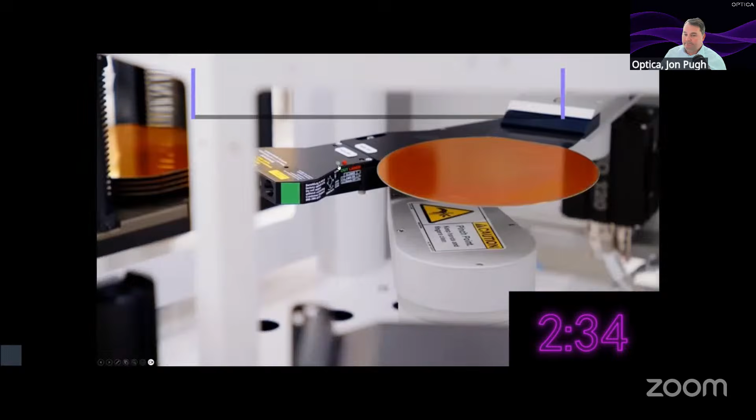Thermals held just right. Datacom shouts the loudest, but it is not alone. Quantum sensing lidar defense need packaging of their own. How do we package photons at the volume AI demands? How do we scale the light with machines, not human hands? Cost per gigabit, cost per port, yield must rise or the roadmap falls short. How do we package photons and build the future on time? Bring the light to the package. Bring the package to the line. Hey, foundries and OSATs, equipment on the floor. System teams are waiting, they need more, more, more. AI factories need light alive.

Alignment automated, interfaces agree. Wafer level testing at industrial speed. Not a demo, not a slide, not a promise, still untried. Ports must ship, lasers survive. AI factories need light alive. How do we package photons at the volume AI demands? How do we scale the light with machines, not human hands? Cost per gigabit, cost per port, yield must rise or the roadmap falls short. How do we package photons and build the future on time? Bring the light to the package. Bring the package to the line.

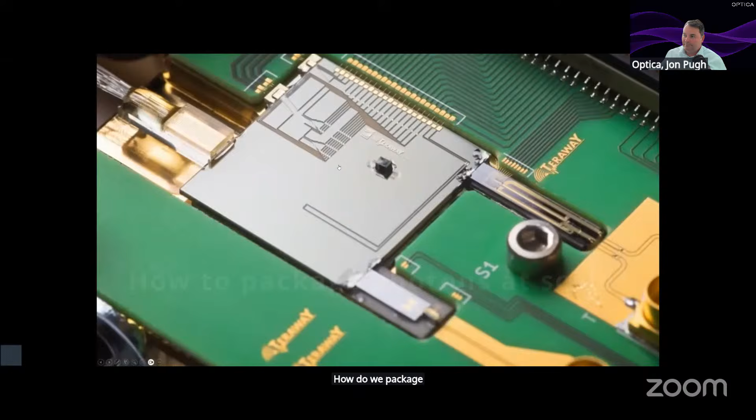Welcome to a packed Optica online industry meeting. Today we're asking one direct question: how do we package photons at the volume AI now demands?

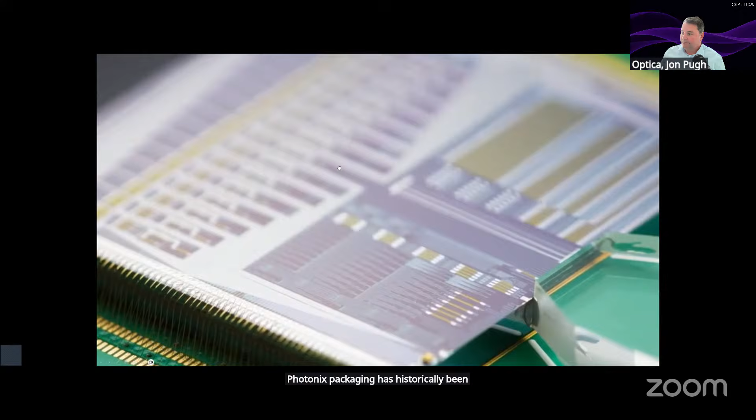AI infrastructure has a packaging problem. Hyperscale GPU clusters need optical I/O on the package itself, not at the faceplate. NVIDIA's Quantum X and Spectrum X switches are early proof that the industry has accepted this direction. But shipping an announcement is not the same as populating an AI factory with hundreds of thousands of optical ports, ready in time for the next GPU launch. Photonics packaging has historically been slow, low volume and handcrafted. GPU deployment schedules are not. That gap is what we're here to close.

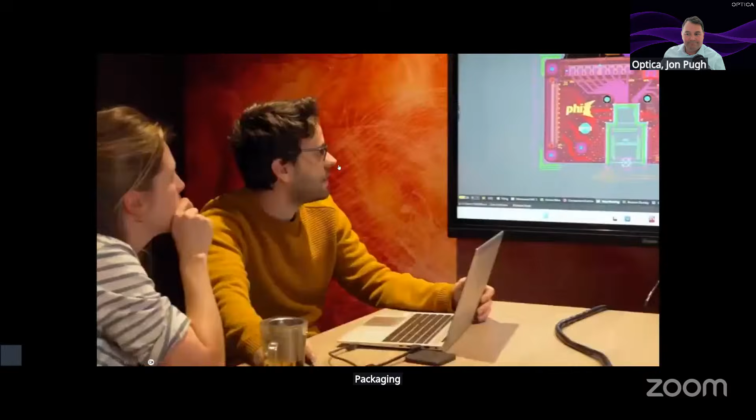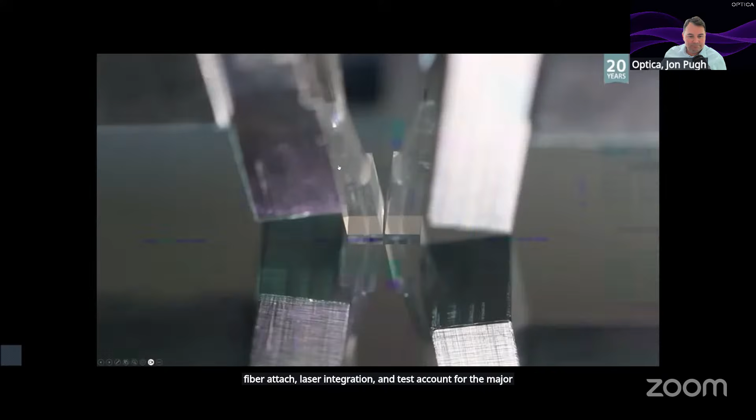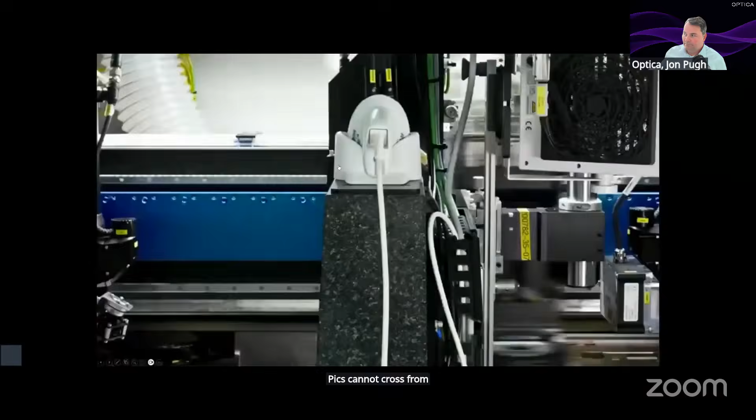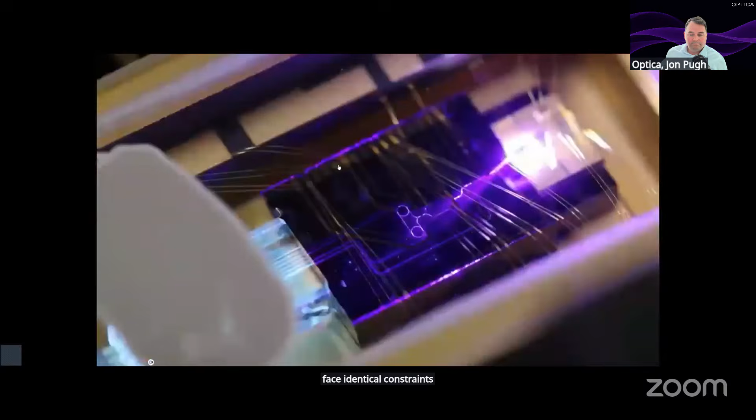Packaging is also the dominant cost in a photonic integrated circuit. Assembly, fiber attach, laser integration, and test account for the majority of a module's cost. Until packaging industrializes with wafer-level processes, automated alignment, and known good die testing, PICs cannot cross from niche to volume market. And the same bottleneck is blocking multiple industries simultaneously. Datacom is the loudest voice, but quantum, biomedical sensing, LiDAR, and defense face identical constraints. Solving this once unlocks all of them.

In the next 90 minutes, we'll work through the specific problems. And to do that, we've brought together two groups of experts. On the technology integrator side: Nokia, NVIDIA, Jabil Photonics, and Light Matter. On the technology enabler side: Photon Bridge, Epiphany Design, Verna Leap, Fix Photonics Assembly, Finetech, and Cellerprint. This meeting is free to attend, made possible by our sponsors, PHIX Photonics Assembly, Ligentec, Vanguard Automation, Nanoscribe, Finetech, and Photon Bridge. So let's get started.

Hello everyone and welcome to a very special session. We have been working very hard over the last months and we have seen record numbers on registrations because we are talking of perhaps the biggest challenge that the photonic industry is facing. Many of you were with us at OFC and you saw the huge boom in demand driven by AI. And we saw the need to change the way that we have been dealing with photonic integrated circuits.

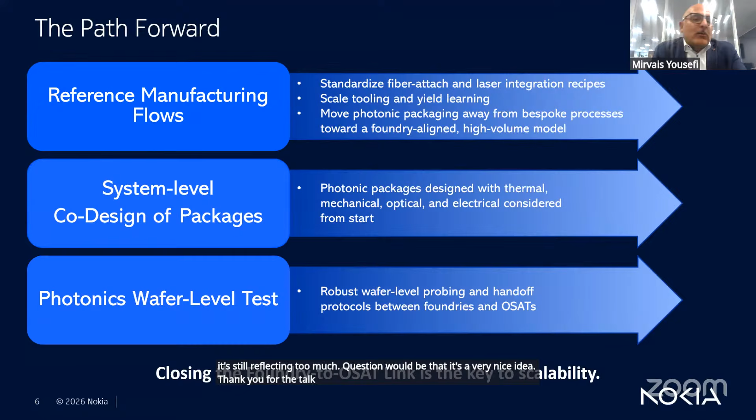Question would be that this is a very nice idea. Thank you for the talk. But you require a bunch of peripheral technologies, like the automation equipment etc., to come into play and be mature in order for you to do this. Do you have an internal timeline, or do you know when we could expect this to happen?

So the obvious answer is as soon as possible. But I think, just catching up with the wave of co-packaged optics and near packaged optics, we're looking into a timeline of 2027, 2028, really.

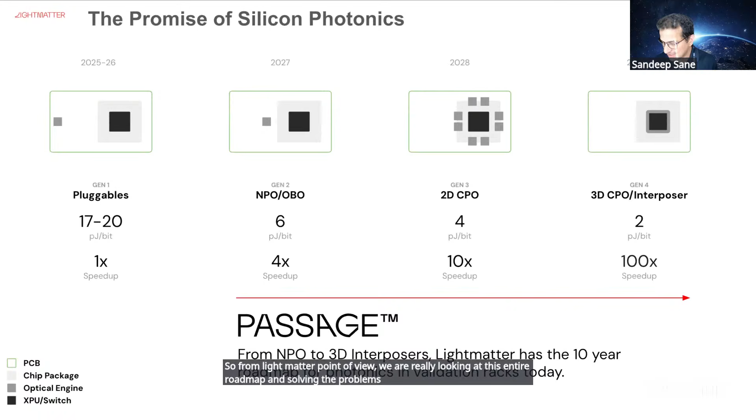So from Lightmatter's point of view, we are really looking at this entire roadmap and solving the problems as the demand of silicon photonics is evolving in the industry.

We are showing that we can deliver 800 gig to 1.0 terabit per fiber that is available today. And it can support both bi-die and uni-die, up to 32T per optical engine, and you can support up to 1 kilometer. And we do both standard or custom designs as needed.

But beyond the technology point of view, while we deliver what is needed for the market, we are heavily focused on what we can bring as key technology enablers with the 3D CPO or interposer programs. These are the two activities we are heavily involved in.

The first one on the left shows a 3D CPO, what we call our L series. This is based on chip-on-wafer assembly flows, where your EIC die is attached on the PIC die as shown, and it's 3D integrated, with detachable fibers at the perimeter.

As Leron said, fiber attach and giving the radix that customers want is a very critical vector. And we believe that detachability allows you to solve at least the fiber attach problem. The next question is, how can you scale? How many fibers can you really attach per edge, which is a scaling problem we have to focus on.

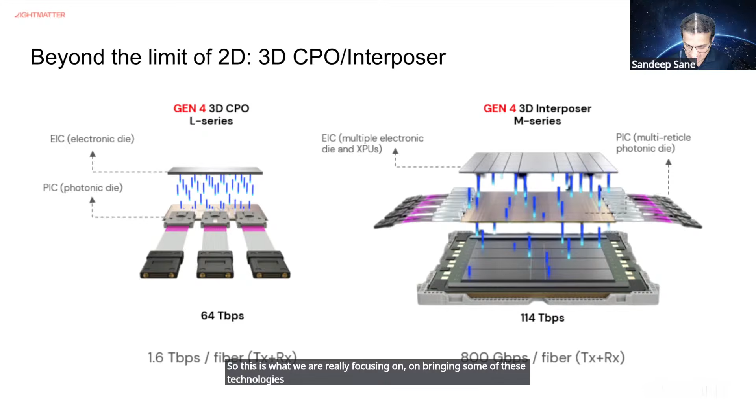Now, if you look at the key challenges for us to enable some of these parts at high volume, it will sound very similar to what Armagan has said, which is good to hear—the same voice coming across. I'll go through 4 challenges that I see, similar to what was previously discussed. Number 1, delivering a known good optical engine is a must-have.

But quickly, because your electrical bandwidth will be limited if you continue on a standard organic substrate, you'll have to integrate optical engines on advanced packaging technologies. Some of these, like EMIB style technology that Intel has, are fairly easy to integrate. But then there are other technologies like CoWoS or CoWoS-L, where now you need to dedicate the optical engine to the die complex upfront.

And this makes it very critical to ensure that when we build the optical engine, it's known good to ship out to any end customer. Think about it almost like an HBM—HBM people build it and ship it out. The optical engine needs a very similar approach.

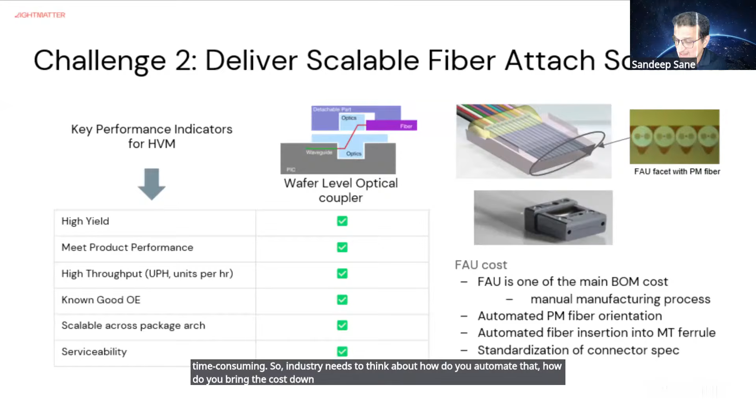Cost is a big deal here, right? The FAU is one of the main BOM costs, and it is primarily because of the manufacturing. It's manually done, and it's driven by the PM fibers, because the requirement of the rotation of the stress rods is really very time consuming. So industry needs to think about how do you automate that, how do you bring the cost down for some of these connectors, and making standardization a must-have.

The third challenge to delivering scale in HVM is really equipment and materials, right? Equipment, you have to transition to automated alignment in seconds, not minutes. You have to be able to do parallel processing so that you can handle alignment, dispense, and UV cure in parallel. And also, we should be able to reconfigure this equipment to support multiple products.

From a materials point of view, this is the biggest time adder today. Epoxy - ideally, just to showcase this, we are showing how many epoxies are used in a simple wafer level attach process, and you will see at least 2 or 3 epoxies are used. If we can align to one single epoxy, that would be ideal.

It has to be reflow compatible. Fast UV cure, less than 5 seconds would be ideal. Today this is the slowest step in the flow, it takes tens of seconds to minutes. And of course, lower TG would be helpful to conform to different warpage requirements of these devices.

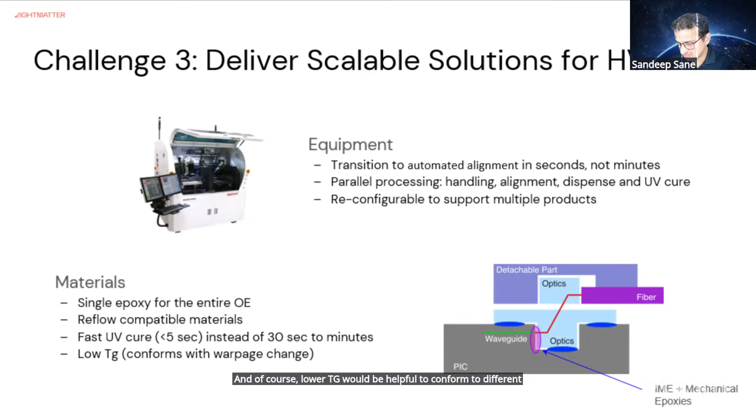If you look at the reasons for it, fiber attach is one of the key things, but higher test times and lack of standardization, similar to what Armagan has talked about, is really causing some of these costs to be much higher. So while we ask the test vendors to work with us on solving these problems, from a product architecture point of view, you really have to design products for DFT, DFM, which is a standard practice in the mainstream industry. But in the silicon photonics world, this has to come upfront and really drive the equipment and material development to push the throughput higher through assembly and test.

So with that, thank you for giving me time to express my opinion, and I'll be open to any questions.

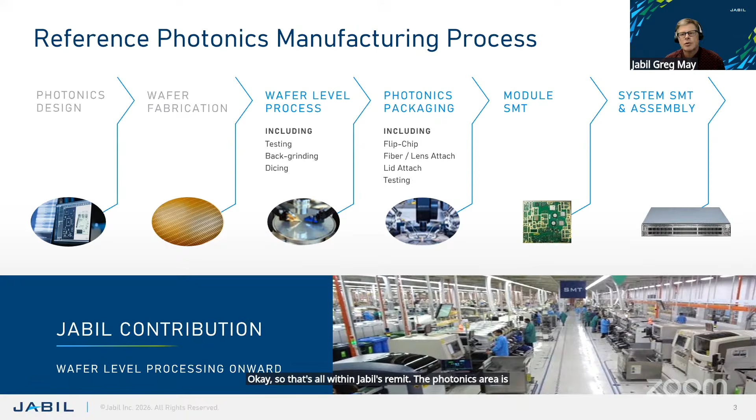Going forward from there, in more of our traditional business, we can put those optical engines or photonic parts onto circuit boards and also do the electromechanical assembly. That's all within Jabil's remit. The photonics area is just over 10 years old, but growing very rapidly.

Most of the audience knows this already. Some of the applications we deal with are transceivers. We manufacture products for other customers, but we also have our own product line from acquiring the Intel product line about 3 years ago, so we have our own going out. We're involved with co-packaged optics and products in that realm, quantum and LiDAR.

Those of us who have been in the industry long enough remember the dot-com boom of the late 90s and how crazy that got and the kind of challenges it portrayed. Now we're in .ai, basically seeing it again, but this time with a lot more vigor and a lot more investment, a lot of real money in this. A very exciting business for us if we can keep up—the hard part is actually keeping up with the demand that's out there.

I won't dwell too much on this. We recognize and acknowledge a lot of the packaging schemes that were presented earlier; this is an overly simplified view of that. And fiber attach, we recognize that too. We've been involved with fiber attach for a relatively long time now, starting with single fiber and coherent type applications, but now we're getting into fiber array units and parallel fibers. There's a number of schemes for that, as we all know.

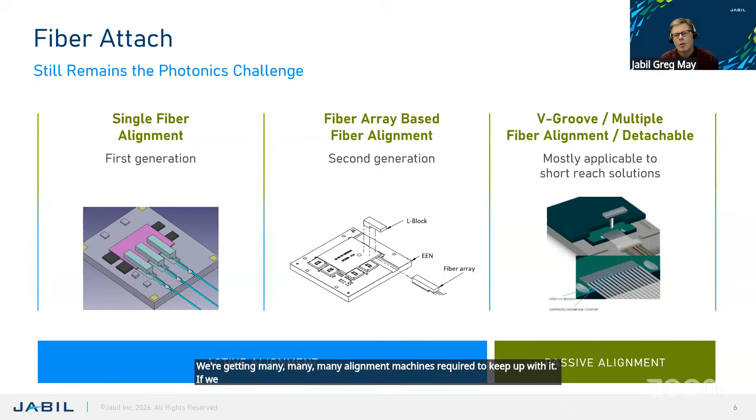So we do have a big challenge here and a big capacity bottleneck when it comes to alignment. For some of the volumes we're seeing, we need many alignment machines to keep up, unless we find a way to break the mold and come up with a different approach.

Jabil's core competency is volume manufacturing, so we really understand what it takes to get something out the door in high volume consistently. With photonic advanced packaging, yield is a real potential issue because you're dealing with so many different adhesives and manual steps. Adhesives are quite challenging to manage—everything from expiry date to supply chain to how they're handled and stored. Automation is critically important, but in photonic packaging it runs contrary, because loading and unloading especially are quite difficult to automate, so if you're not careful there can be a lot of manual manipulation.

I don't think we spend enough time really thinking about all the materials that go into advanced packaging to make a robust product.

It can take a number of iterations and experiments to figure out exactly what you want to do there and to meet the robustness as well as the manufacturing volume objective. We see this with work instructions, the workforces that we need.

And then finally, as mentioned previously by others, production test is really important, catching it at this earliest point of value add. So getting your production test to detect a build error or defect early before you start adding in expensive parts like DSPs, lasers, and other parts like that.

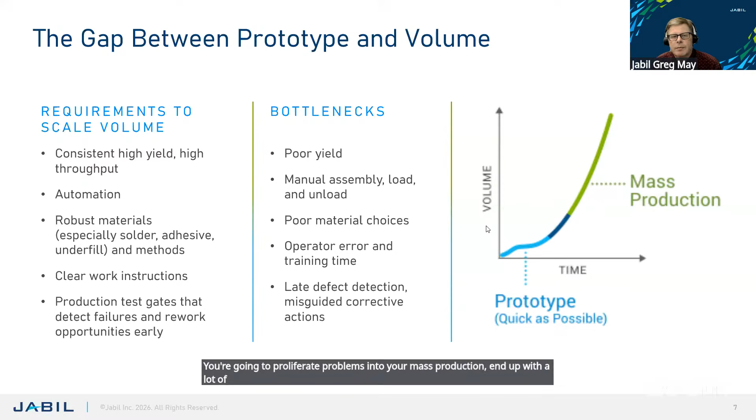The approach that we do here with Jabil is that we take a DFM, DFT philosophy. What we've done, I think, which is fairly unique in the industry, is that here in Ottawa we have an NPI environment with a lot of the same machines that you would see in a volume environment. We have our fiber attach, we have die bonder, we have pick and place, we have reflow, in a captive NPI facility. This gives you the time to do your experimentation without interfering and competing with mass production, in an environment where you're surrounded by subject matter experts.

What we've been finding is that if we work very closely with the customers, but also with quality assurance labs, rapid turnaround of imaging and sectioning in particular is very important to drive and iterate to a robust solution. You need to figure out things like your temperature profiles to get the integrity of your solder correct, make sure it's void free.

We in Ottawa have a fluxless reflow system. So instead of using chemical flux, we use a formic acid vapor that reduces residue and keeps the voiding out of underfill, and also produces clean photonic parts that are less obstructed with particles when it comes to align and attach. So we work closely with our customers.

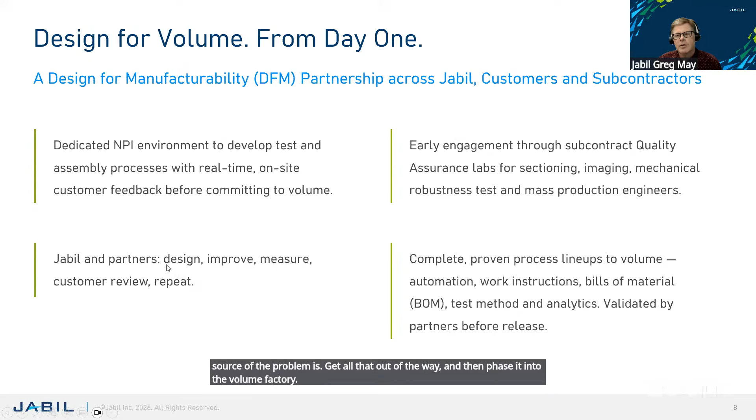We apply what you'd recognize as similar to Six Sigma. We work collaboratively with the design, we improve, we measure the outcome, and we circle back, so we iterate to improve. The whole goal is to get what we know very well from other industries, a lineup with build documentation, bill of materials, work instructions, everything, test methods that actually pinpoint where the source of the problem is. Get all that out of the way, and then phase it into the volume factory. If you don't plant the right seeds, you don't get the right result at the end. So we've really embraced that concept.

Finally, just a bit about what we do. Here in Ottawa we have an advanced packaging facility, again a captive NPI facility with a lot of the processes that you would recognize. I won't get into the detail there.

Currently in Jabil, even though the corporation has probably hundreds of factories, the one that we deal with most is in Malaysia, but we are currently bringing up factories in India and the US as well.

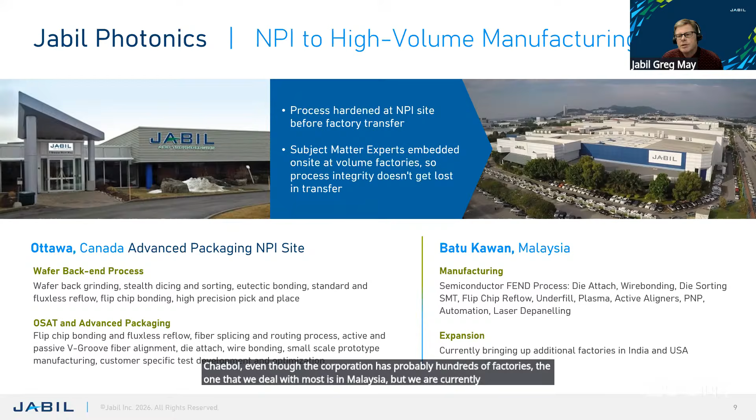Okay, that's my presentation. Thank you.

Thank you very much, Greg. Thank you for being here. We keep receiving fantastic, amazing feedback from all the different big companies that collaborate with Jabil.

Is it limited to big companies when it comes to Jabil? Because most of your customers, at least the ones that I know, they are typically large companies. But I think your presentation today said a bit otherwise.

No, absolutely. Especially in the NPI facility, we will work with just about anybody. There is a hook there, though. There are lots of research institutes that will help you develop packaging, but they're disconnected from mass production. You can get it through the research institute, but our philosophy is to be a gateway to mass production. So the little guys we work with are the ones that we think can get into the factory next, that have really high potential for volume.

The question I asked in the chat was: Jabil has an amazing portfolio of capabilities, all the way from design, wafer fabrication, to packaging. We're looking today at these real challenges in packaging and integration. The question I posed was, where does Jabil intend to lead? Where do you want to really be the one we look to for solving these problems we're all talking about?

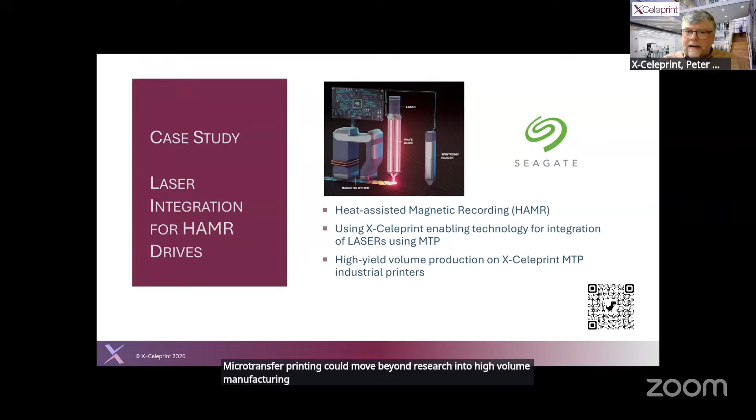Yeah, it's been a journey, but probably the best kept secret for quite a while, right? Because it's not simply that it's happened this year that Seagate is leading the charge in this type of integration. It's actually been happening for quite a while, albeit secretly. It's an important proof point, but it's not unique, in that many of our comms customers now are beginning to see those benefits. So it has moved, you could say two years ago, really into a high volume production environment.

And now the telecom and datacom sector is actually benefiting from the proof points that were delivered by hard disk drive. Even though it sounds like a different application, the challenges are exactly the same, whether it's with or without adhesive integration, the diversity of materials that have to be handled. We've passed way beyond research now into high volume production, and it's all on the same tool platform. So the tools that are in use for research and proof of concept are now moving all the way through to the volume manufacturing scale.

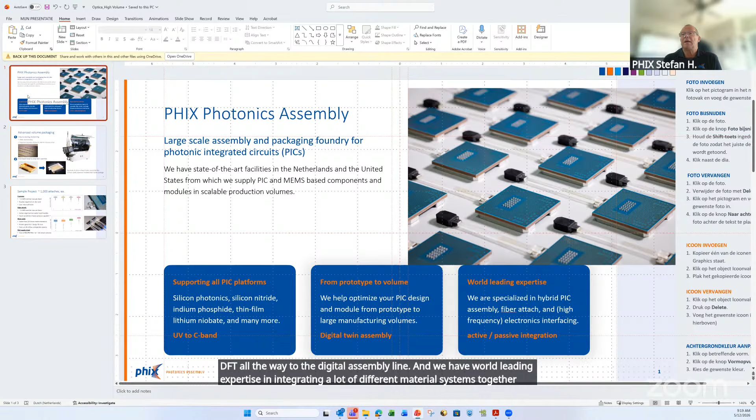We heard from Jabil a very great presentation. We do digital twins, and not only design the product, but we also do digital twin assembly. We bring it all the way from designing your product, DFM, DFT, all the way to the digital assembly line. And we have world-leading expertise in integrating a lot of different material systems together, active, passive integration, just in one dimension or in 2.5 dimensions.

And when we talk about advanced volume packaging, what do we do in terms of scaling product? We address all these pain points, to a different level than you heard before from the end users: fast, reliable wafer level processing of tested components of known good dies. The core expertise is summarized here.

Two different streams of core expertise. One is wafer level assembly processes, of active and passive components, whether it's an optic or whether it's a VCSEL or a gain medium or a photodiode or another material system. We put die on wafer in a fully automated way with an accuracy of 300 nanometers and below.

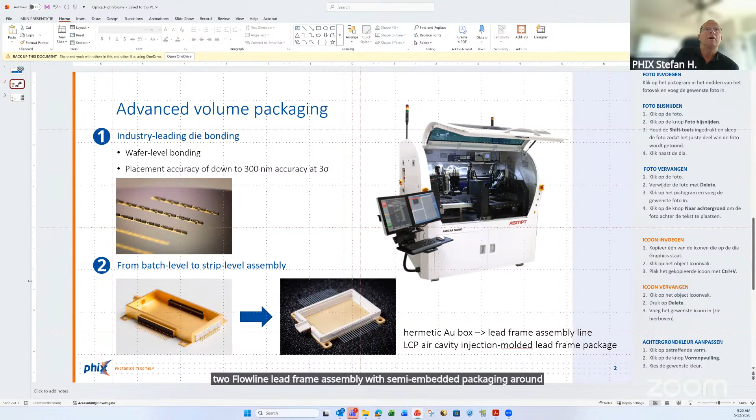And last but not least, I wanted to round up our presentation with one of our sample projects in the datacom industry, where we do fiber attaches in a fully automated way for the different configurations out there, whether it's a V-groove or an edge attach.

If you go to edge attach, insertion losses are a little higher, and process capabilities are still a little lower, and that is part of the known good die strategy.

What do we see in the future for us to address? This is nothing new, we heard that from other speakers as well: lower losses is always good, better known good dies designed for test, faster curing, and also reflow compatible epoxies. So we're heavily investing in epoxy-free interfaces, not only for that purpose but also since we're pushing into the visible and the UV in many other applications where we need epoxy-free interfaces.

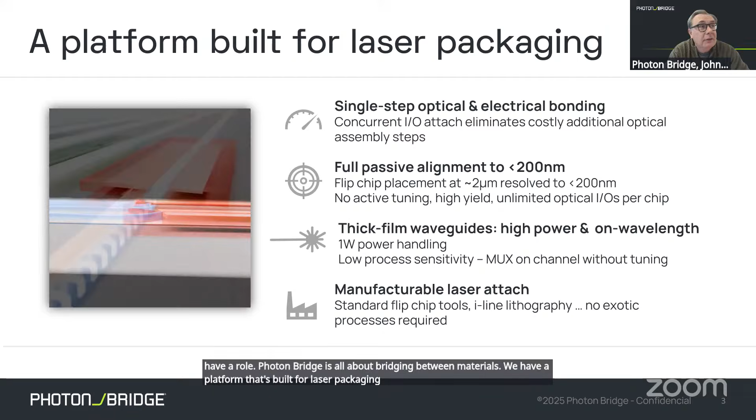You can see a placement of a laser or a modulator or whatever active device you like onto a piece of silicon. It's all about single-step optical and electrical bonding in one go. We do in seconds full passive alignment to less than 200 nanometers based on a flip chip placement accuracy of 2 micron. That means you can do it at speed.

Our platform includes thick film waveguides, which means you can deliver and transport high optical powers, and you can be on wavelength. Thick film for us means low process sensitivity, which makes the design and performance of the MUX just better. All this adds up to a manufacturable laser attach platform, with highly scalable standard flip chip tools and i-line type lithography, so no exotic processes required.

So what I thought I'd do next is share a little insight into what we're doing with this platform. This is the Photon Bridge laser source, designed to scale. Here's a picture of our TOSA, which we've announced we are packaging with PHIX. It's got on-silicon wavelength multiplexing, building on our high on-silicon power, scaling colors by addition, not amplification, which means you can move through 8, 16, and then 32 colors.

Perhaps really important today, we bond fully manufactured, burnt-in tested indium phosphide die. Our process means we have a path to multiple qualified sources, offering supply chain redundancy and resilience that we think is unique to the platform. We're developing it today, stay tuned. Target performance is greater than 30 milliwatts per wavelength per fiber, targeting a 16% wall plug efficiency, which is what we believe the market needs today.

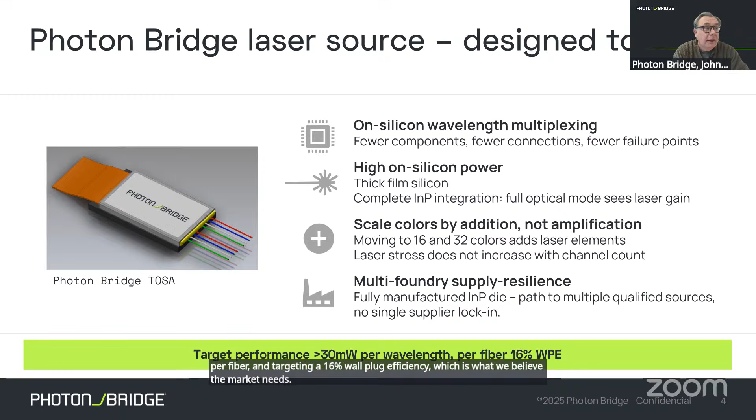If you're working on CPO integration or advanced packaging, we'd love to talk to you. Thank you again for taking the time to listen. I really love to hear questions, but if you'd like to reach out, these are my coordinates.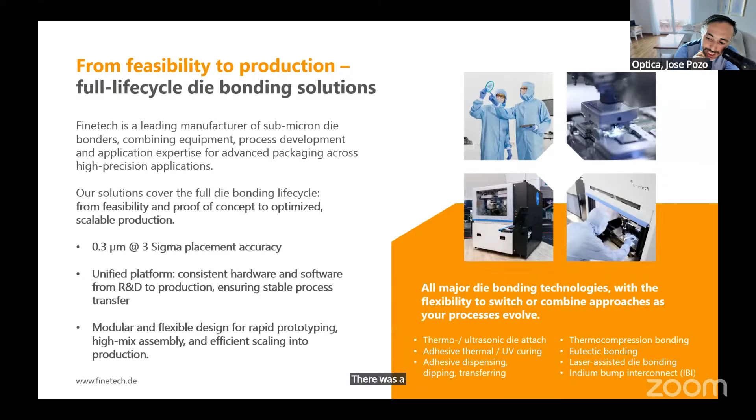Thank you very much. The key challenge that Finetech keeps solving and making things fantastic for our industry is when it comes to direct diode bonding. There was a very clear request from Jabil on the UV curing epoxy. Is there anything that you're working on this?

So we offer a wide range of dispenser technologies, and we have our own proprietary ultraviolet curing strategy. We also know that this is very critical when it comes to active alignment. So we're also kind of dipping our toes into the world of active alignment, trying to understand epoxy drift during curing, and epoxy behavior before and after curing. At the moment, we don't have any off-the-shelf solution for this, but we've always faced the same issues as the industry, with epoxy drift and cure drift and this kind of thing.

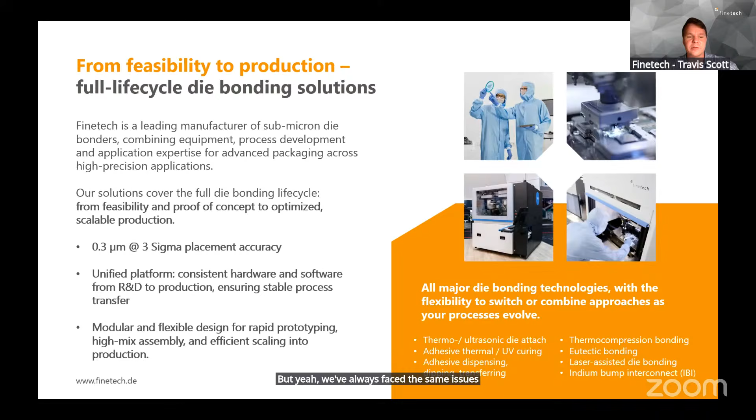Travis, congratulations on what you're doing. I know the market is booming, I know there are many orders, I know you are doing a fantastic job with this 0.3 micrometer accuracy with passive alignment. Allow me to bring another company that is really doing a huge impact on the semiconductor industry, but is pushing the photonics industry as well.

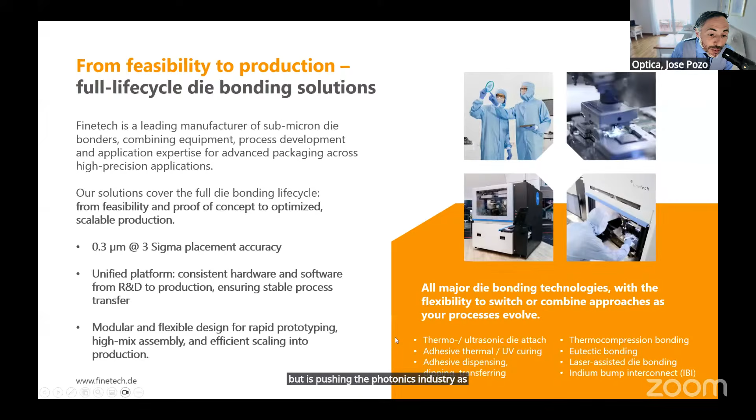Thank you very much, and I hope you can see my slides. Excellent. So thank you very much for having the opportunity to introduce the company and myself. Let me start. I'm, as you said, the new kid on the block at Optica, but not entirely new to the field. So I started out in micro-optics with Reinhard Völkel, got pulled into semiconductor manufacturing processes and equipment at SÜSS MicroTec, and now with Lieb, I'm trying to connect the dots, maybe shaving a little time off the journey from lab to fab. So let's see if we can get close to that within the community.

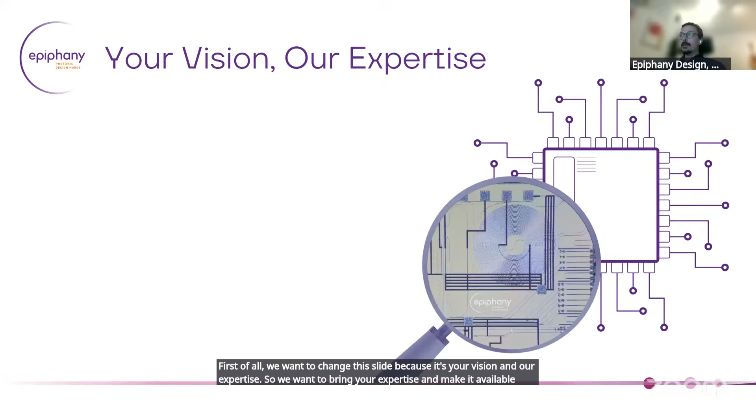First of all, we want to change this slide because it's your vision and our expertise, so we want to bring your expertise and make it available. We offer design solutions and supply chain support, so we bridge the whole supply chain where packaging is the first line.

We also do that by making design kits for our customers to make their technology available. That's also what we are planning and will do with NLM, to make their process available. We will also help them developing the PDK for that in order to be accessible.

We combine all this internally with the hybrid laser design module, for example, where we have pre-tested, validated hybrid lasers that can be packaged and where the package is already validated, so you don't have to experiment in the processes there.

That's what we call ABCD, assembly-based chip design, because you really want to fit into the standard chip design that people offer. That's why I asked Jabil, how can I access you? How can I make chips for you in order to have a smooth transition for our customers?

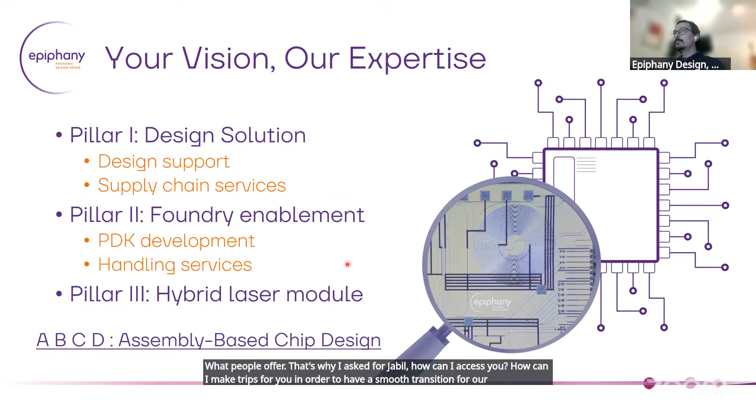What is very important, of course, is the design verification. Because bringing EICs and PICs together, as we heard in many of these talks, is very important, and that will be done via design and verification. Why verification? Because you want to be really sure you're doing the right thing and not lose time and money. So typically we start with the schematic and the simulations and mask layout, and then do the verification.

We go all the way back for checking it with DRC, also do post layout simulation. Is it really what I want to get? And also lastly, layout versus schematic, to really see, is it what you will get, what you can package such that you can go to the market with your designs.

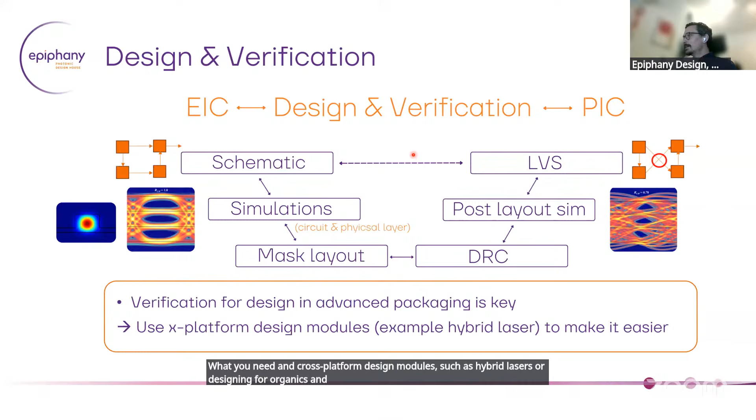Verification in design is key for advanced packaging, in order to have what you need. Cross-platform design modules such as hybrid lasers or designing for organics and polymers is key to make technology available. Thanks a lot, I'm happy to receive any questions.

Well, thank you, John, for being with us and for what you are doing for the industry. But one key question, and I think many of us had this question in mind whenever we hear about the current ecosystem on PDKs.

Is there a way? Or is there going to be a way in the future that I can easily transfer my design from one big foundry, let's call it global, to another big foundry, let's call it tower? Is that going to happen?

Yes, actually, that is what we're doing for our customers. We go one level higher and design agnostic of PDKs, such that indeed the technology transfer from one fab to another is easy.

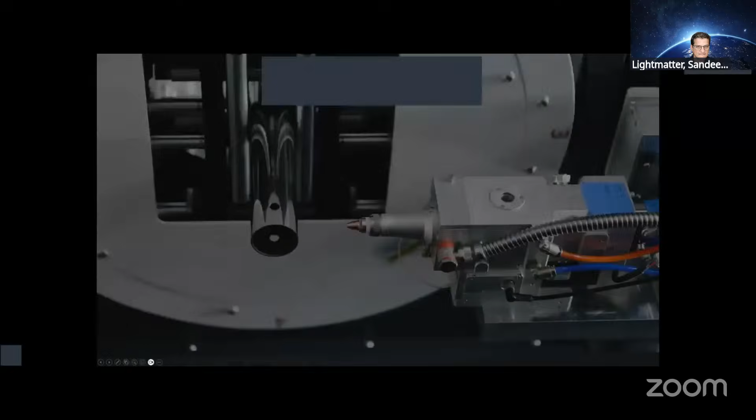This is Optica. This is lighting redefined.

All right, so allow me to ask IT to kindly close the live stream. This becomes now a private event. I can undo my tie and breathe again. And I would like to thank everyone. Oh my God, so many people joined today. For those of you who had to leave because you had to pick up the children, because you had to start working.